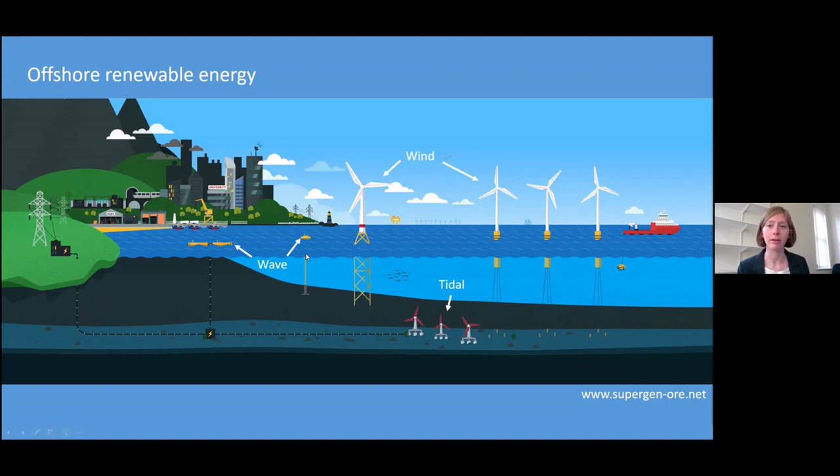I just put this up to show that I'm going to focus on the three main sources of offshore renewable energy power extraction technologies: wind power, tidal power, and wave power. That's what I'll be focusing on today.

So just so everyone knows what we're talking about, this is wind power, a wind farm. This is Hornsea 1, the largest offshore wind farm in the world, with a capacity of 1.2 gigawatts, enough to power over 1 million homes. Wind energy is by far the most mature technology out of the three.

Then we have tidal energy, which people tend to be less familiar with. The simplest way to explain it is you can think of tidal turbines as wind turbines, but they operate underwater. The actual technology of energy extraction tends to be exactly the same, and that's why they often look very similar in shape.

This is an example of a fairly large scale tidal turbine, 18 meters in diameter, rated at 1 megawatt, and a large scale industrial prototype. In this case, instead of wind generating the power, the flow movement through the tides moves through and powers the turbine. But other than that, it's very similar to a wind turbine.

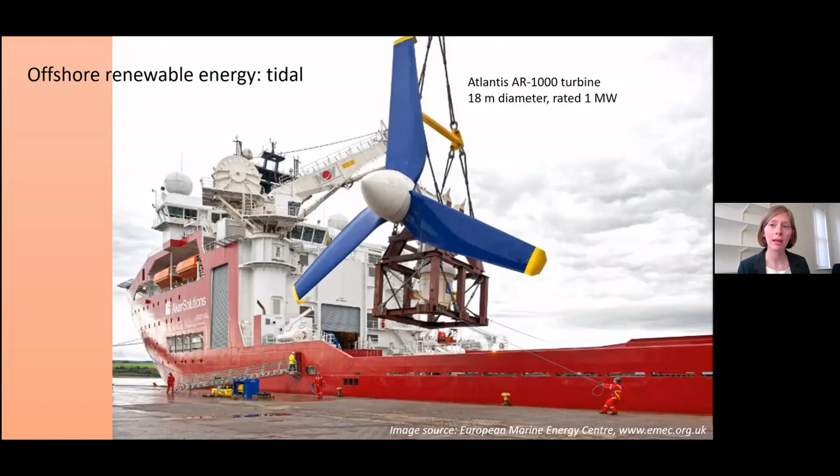And then we have wave energy. Here is a picture of a wave energy device. It's much more difficult to find a representative picture because there are so many different kinds, and I'll go into that a bit later. Here's an example of a 0.75 megawatt rated wave power device, a prototype being tested at a test site in Scotland.

So why talk about offshore renewable energy? Primarily the UK is investing in this because it has a huge offshore renewable energy resource. The UK is pretty much one of the windiest countries in Europe. I've read an estimate that around 40% of all the wind in Europe goes through the UK, which is quite a lot.

It also has an estimated 50% of the European tidal power resource. So the UK is investing in this because it's a natural resource the UK has a lot of. It's been estimated that offshore wind has the potential to deploy over 40 gigawatts by 2030, which is pretty soon—enough to power all the homes in the UK.

Tidal, conservative estimates say we could deploy up to 27 gigawatts by 2050. Wave, practical estimates say maybe 22 gigawatts by 2050 if we invested in the infrastructure. But to do this would require a lot of industry development.

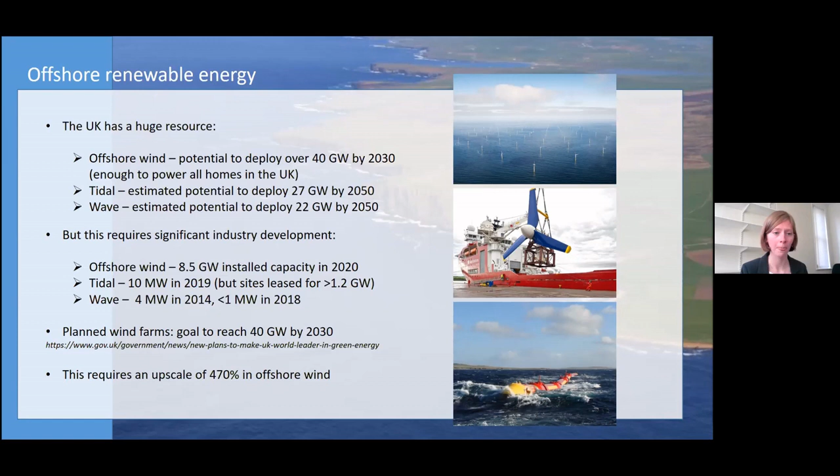So what I was going to talk about is, from a technology perspective, what does it take to scale up, in particular wind power, to those levels of production?

What engineering challenges are associated, and what are the consequences for energy security? And then I'm also going to talk about what might be the role of these smaller offshore renewables like tidal and wave, in order to contribute to this overall net zero goal.

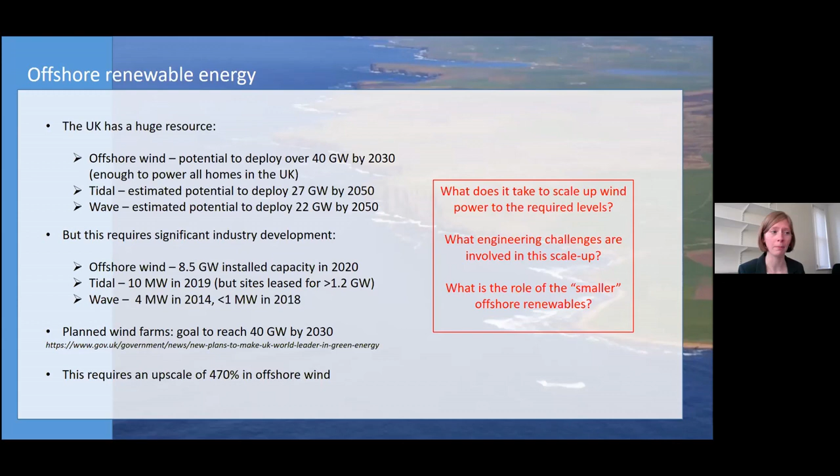I just want to go through quickly some things that I'm not going to talk about, sadly. There's so many aspects of this that I don't have time to talk about today, and that also is not necessarily my area of expertise.

Energy storage and grid connectivity is often brought up as an issue with intermittent renewable energy, and those are real issues being actively researched, but I'm not going to mention them too much today. There's also the environmental impact of offshore structures, which is a real problem being researched, but not my focus today. There's other things too, like logistics, infrastructure, government policy, but that's not going to be my focus today.

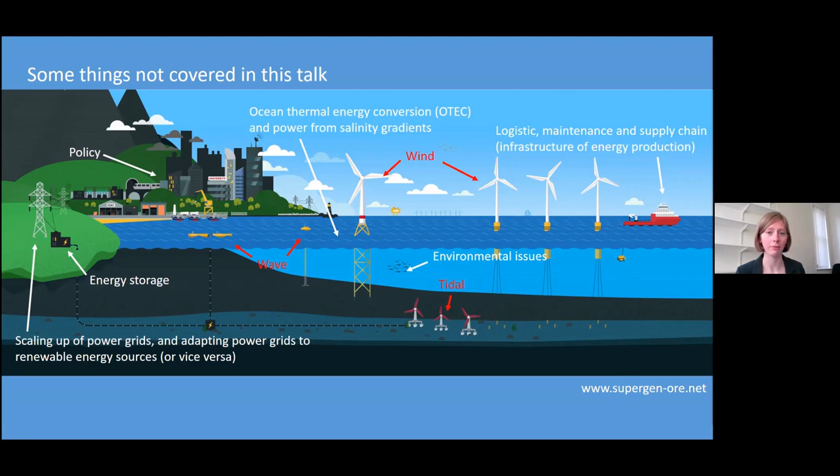My focus today is going to be primarily on the technology of energy extraction itself. So it's going to start off by talking about wind energy.

At the moment, the plan is that wind energy will be one of the primary means of reaching energy net zero in the UK, according to the government's plan. Currently, there are just over 8,000 onshore wind turbines installed in the UK and just over 2,000 offshore turbines. So there's about 4 times as many onshore turbines.

But offshore wind turbines are currently producing half of the wind power in the UK. So basically, offshore is giving you a lot more power per turbine. That's a real positive.

The reason offshore wind turbines give more power, or why you want to go offshore with a wind turbine, is that the winds are much more consistent and much stronger. That's really important because the power you get from the wind scales with the wind velocity to the power of 3. So if you double the wind velocity, you get 8 times as much power. So increasing the velocity makes a big difference to power production.

The wind is also less intermittent offshore. You can build much larger turbines because it's not as intrusive to communities and things like that. So all of these are good reasons for why it's a worthwhile investment to go offshore.

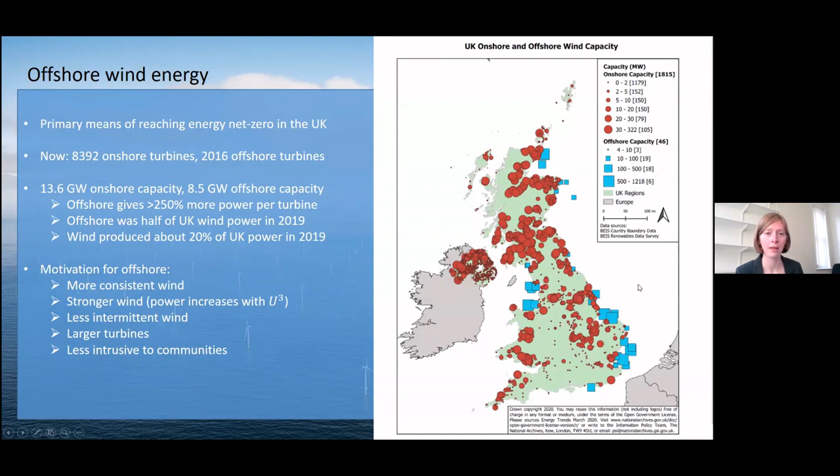There are 39 new offshore projects currently ongoing, which, should they all be realized, would represent roughly a 400% increase in the number of offshore turbines. If this all happened, that would actually reach the target of 40 gigawatts installed capacity by 2030. So far, we're on track to meet that target.

An interesting point to note is that a typical wind turbine lifetime is about 25 years. So while we often think about 2030 as the target, if we think about the 2050 timescale, we're actually going to have to build the same number of turbines all over again, because all the turbines currently in production will have reached end of life. So there's a lot of turbines that are going to have to be built.

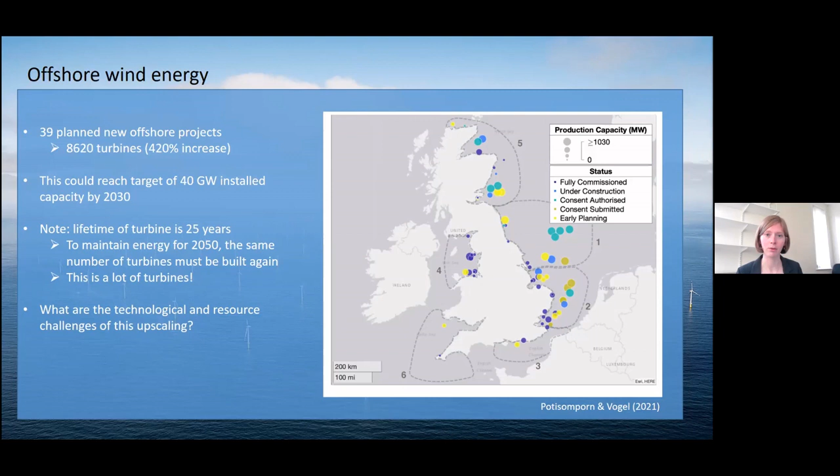So we're just going to talk a little bit about what the technological challenges are of such a significant upscale in wind turbine use and production. In terms of implementation of renewable energies and new types of energy, cost is basically the main driver for whether a source of renewable energy can be implemented at large scale.

The problem with going offshore is that building things offshore is really expensive. So even though you get more energy yield per turbine, building the turbines themselves becomes extremely expensive. Some issues include just building anything underwater—it's hugely complicated, and it's much harder to access the turbines for maintenance.

You need to think of issues like storms, and survivability of the turbines in very harsh weather conditions. Actually one of the primary costs is power cables. If you build very far offshore, which you might want to do because that's where the strongest winds are, you might end up with a really large expense in transporting that energy back to the mainland.

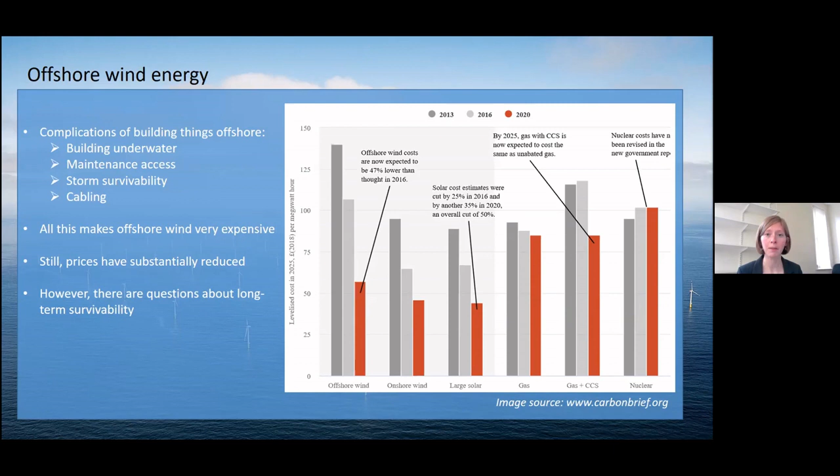But it's far from everywhere - there's quite a lot of very deep sea areas around the UK where you couldn't build a conventional turbine. In Southern Europe, you have potential too - if you look at Spain and Portugal, for example, they do have the resource, but the seas are just too deep for it to be practical to implement. Again, this is why the UK is in a good position to develop wind energy. But the fact that we can't build in deep seas is a problem if we want to scale up and rely on wind, because we're missing potential high-speed wind resource that's too far out into deep seas.

So one of the technologies that's been developed and is currently hailed as the key technology to enable more widespread international implementation of wind power is the floating platform wind turbine. In the UK, this is also hailed as the future of wind turbines. Even though we have quite shallow seas, it's still going to be a benefit in terms of accessibility of the resource.

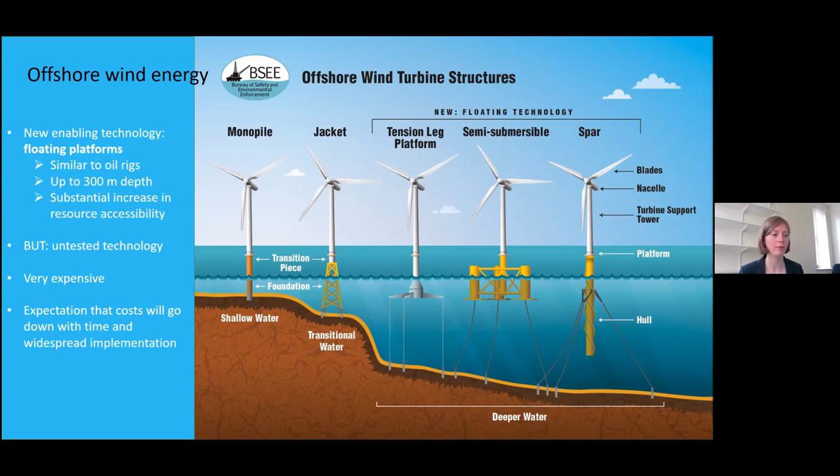But it is an untested technology - quite an early technology, and at the moment it's very expensive. The expectation is that the more this technology is implemented, the more the cost will go down. So rather than a technological problem, it's seen as an implementation problem - when this starts to get implemented, the cost should go down.

The problem with forces that oscillate in time is that even very small repeated forces can cause damage and eventually destruction of the blade—more so than a single large load that's constant in time. A small load that oscillates over a long period can be more damaging. So that's potentially a problem for this type of turbine long term. It's called fatigue loading, and that limits the lifetime of the turbines. A turbine with a shorter lifetime will produce less power over its lifetime, which increases costs.

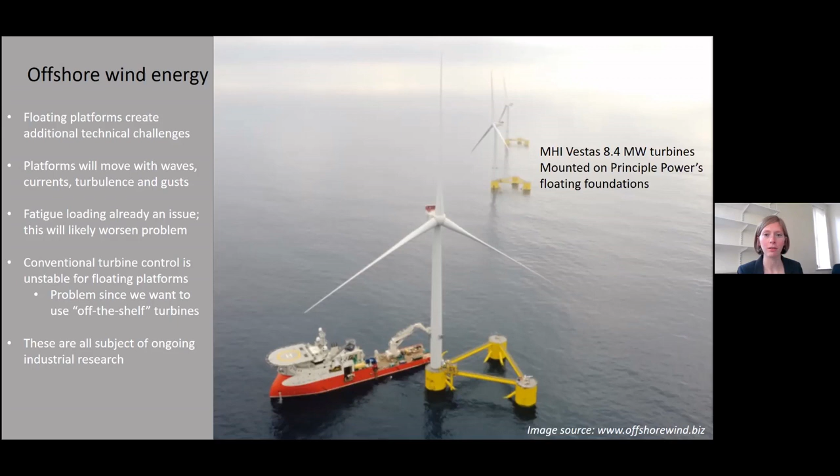But this is all subject to ongoing industrial research, and there are definitely indicators that these problems can be overcome. As I said, these technical challenges will not hinder the implementation of these wind farms—there is still going to be large-scale deployment.

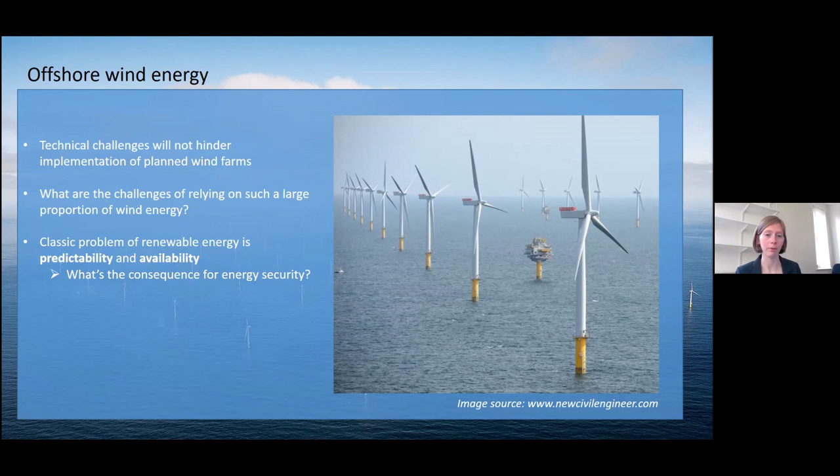So the question is then, what are the consequences of this large-scale dependency on wind energy? We're starting to go into more of a question of the predictability and availability of energy. What does it look like for a country to depend on an intermittent renewable like wind for a long period of time? What are the consequences for energy security?

Normally we start thinking about energy storage when we think about these things, and that is correct—we should think about developing storage technologies for energy to increase security. But another thing we can do is diversification of the energy resource. It turns out that if you increase the number of wind farms, you can actually increase the reliability of the energy system, but only if the different wind farms are not correlated to each other. If your two wind farms are not producing energy at the same time, if they're uncorrelated, then you increase the diversity of your system, which increases security.

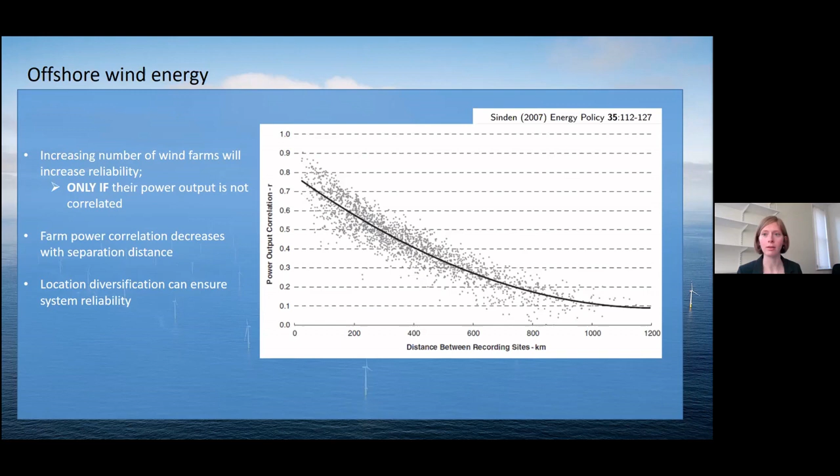And the interesting thing here is that this isn't just about how close the regions are to each other—it also depends on the prevalent weather systems that pass over the UK.

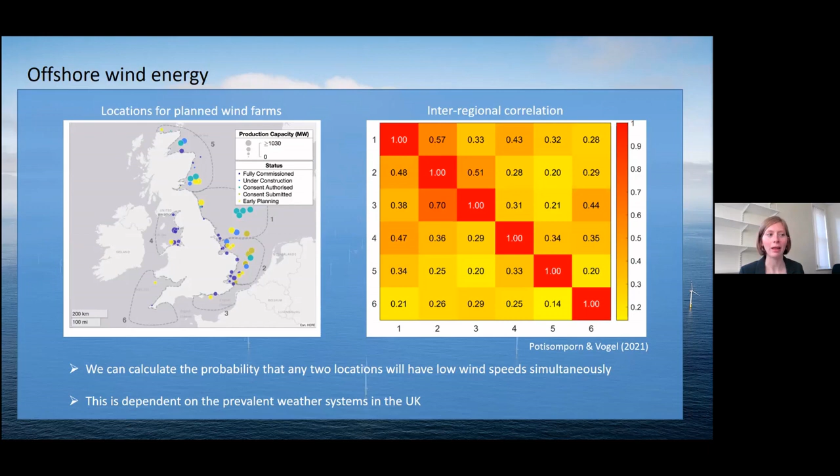There's a prevalent weather system that comes regularly to the UK, creating regions of low wind speed that tend to move through the channel from north to south. So we know because of these weather patterns that there will be long periods of time with low wind speeds in this sort of space. That's something we can predict, and we can have a probabilistic model of how likely it is that we'll have low wind speeds at any given time. So that's one way to increase reliability.

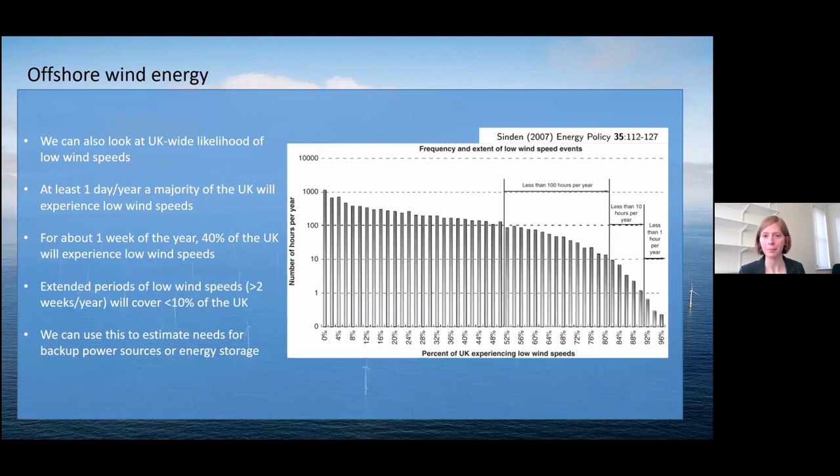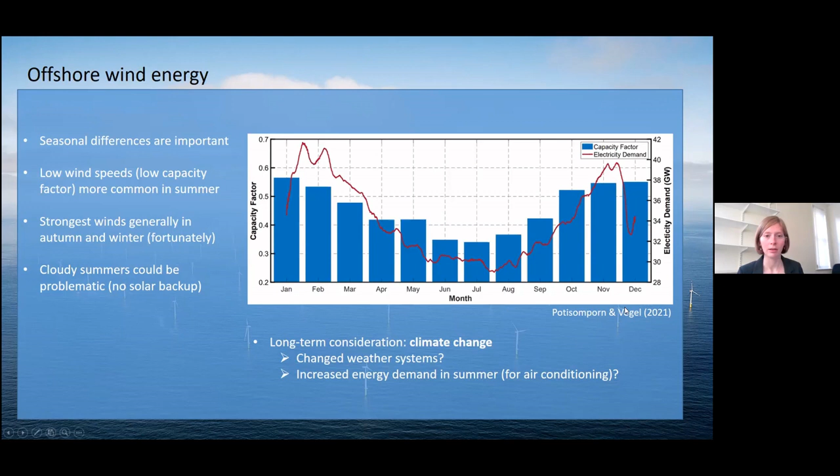Of course, a very interesting long-term consideration is climate change. I already mentioned that weather systems have a big impact on how much power can be generated in the UK and which regions can generate it. Climate change may change those weather systems, making it more difficult to predict long-term what's going to happen. We might also get increased energy demand during the summer because people start using air conditioning more. So all this adds a bit of uncertainty to the wind energy resource, which will need to be dealt with somehow. But for now, the correlations are pretty good in terms of available energy with demand.

So that was a summary of some of the ongoing research topics in wind power. There are a lot of other additional technical challenges, a lot of really interesting ones. Fatigue life, as I already mentioned—how to predict it, how to account for it, how to increase reliability. Another very interesting aspect of wind power is blade degradation over time because of very small particle impacts on the turbine blades, which erodes the blades and reduces efficiency of the turbine—that's really bad. You also get ice build-up on turbine blades sometimes, and you have to actually get helicopters up to wash off the blades, which takes quite a lot of maintenance.

Control of loads and power output is a big topic. We often want to increase the size of the turbines a lot, because that gives us more power, but is that even possible? Structurally, with the materials, that's a really interesting research topic.

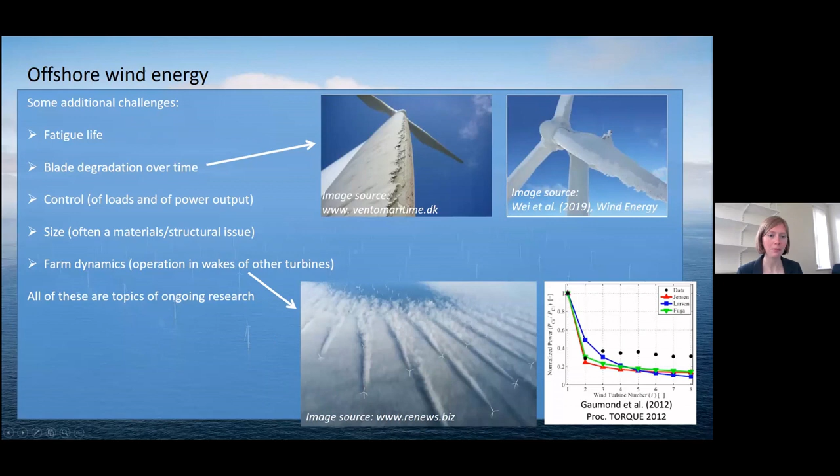But I do want to emphasize that none of these are technical limitations for widespread implementation of wind power. That's kind of the point. So what becomes a long-term issue is more, okay, how do we ensure reliability of the resource? A system that is very reliant on intermittent renewables needs a lot of redundancy or backup fuels to ensure energy security.

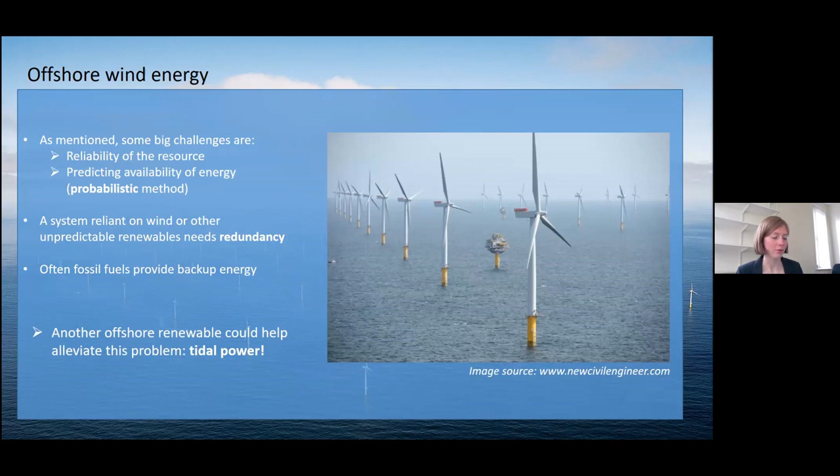In order to not rely on fossil fuels for backup energy, another offshore renewable could be a very suitable alternative as a renewable baseline energy, and that is tidal power, which is kind of my favorite topic because that's what I work with on a day-to-day basis.

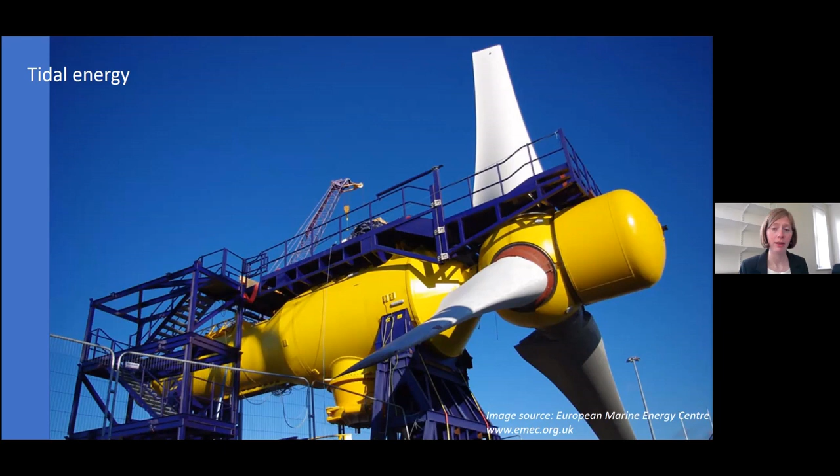As I mentioned before, tidal turbines and wind turbines generate energy using the exact same technology of energy extraction. The difference between them is that the working fluid is water rather than air, because both air and water are fluids, the only difference being the density. For that reason, tidal turbines often look very similar to wind turbines, but we'll talk about some of the differences between the two in a moment.

So why is tidal energy so interesting? Well, as opposed to the majority of other renewable energies, tides are completely predictable. So if you combine this predictability with storage, you can have a completely renewable and predictable baseload energy that you can use to complement intermittent renewables like wind.

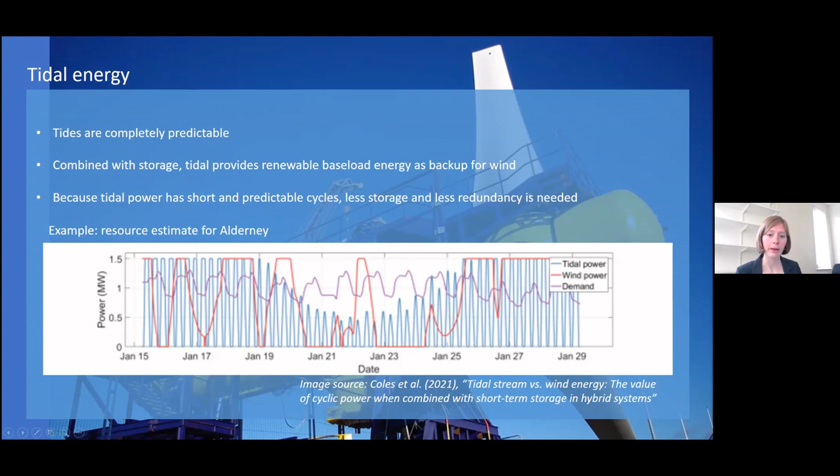As I mentioned, the UK has one of the largest tidal resources in the world. Predicted practically achievable energy is 27 gigawatts by 2050. But there's only 10 megawatts installed at the moment. So the question is, why is this industry struggling so much to take off? That's what I'll talk a little bit about now.

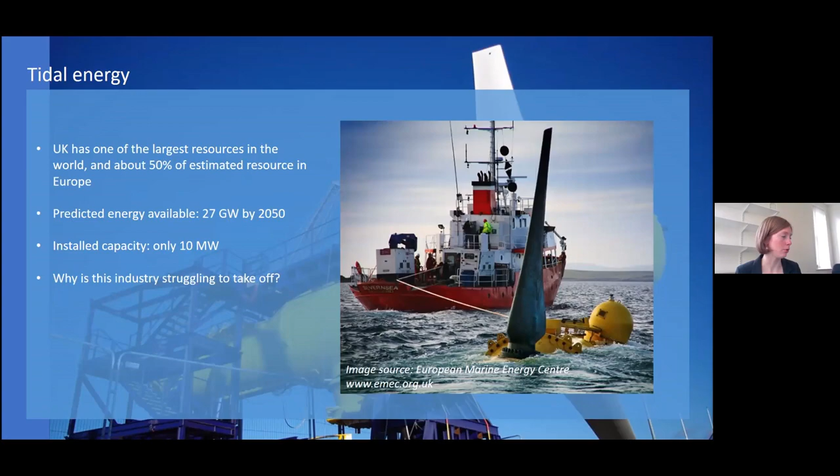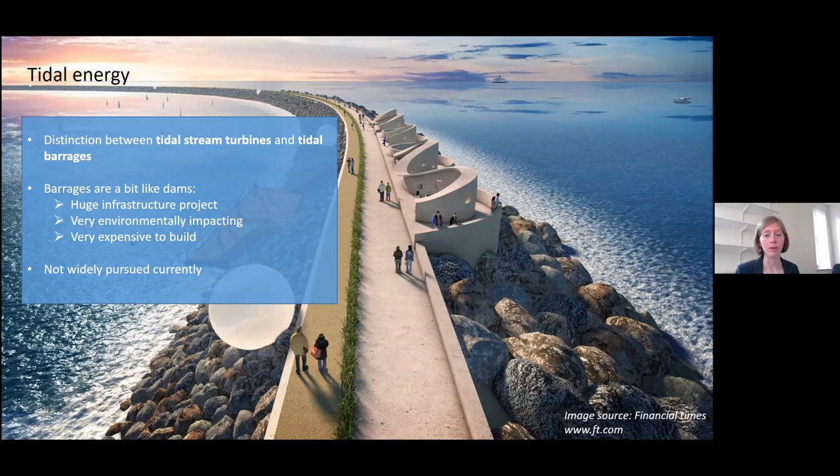There have been a few of those planned, and there are a few that exist around the world, but it is a huge infrastructure project. It costs a lot of money, and it's very environmentally impactful on the local environment. So it's a bit controversial, and there aren't really any projects planned in the UK at the moment. So that's not what I'm talking about. I'm talking about tidal stream turbines, which are freestanding, independent devices, and look much more like a wind turbine.

So there's a sure sign that the tidal industry is less mature than the wind industry, and that is that there are so many different kinds of tidal devices.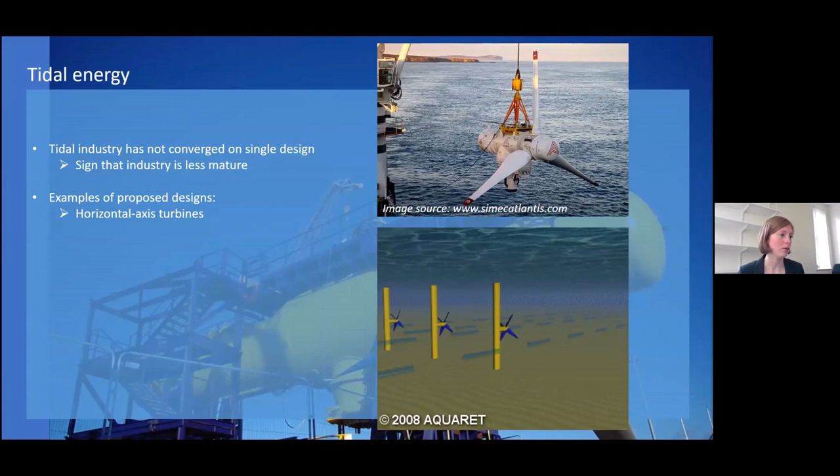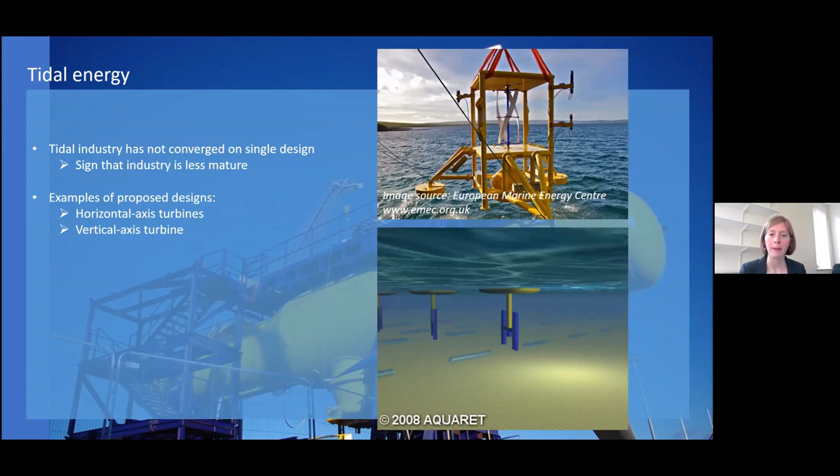So here are some examples. This is the most common kind - the horizontal axis tidal turbine. It looks a lot like a wind turbine. You also can get vertical axis tidal turbines, again very similar to equivalents in the wind industry. So those are probably the most common ones.

Then you get some very out-there interesting concepts like this, which is an Archimedes screw design. It's interesting because it's based around a pump design that used to be used in ancient Egypt to get water out of the Nile, and they've now rethought that design into a tidal turbine design, which is really interesting. But again, it's quite an out-there technology, not exactly the common solution.

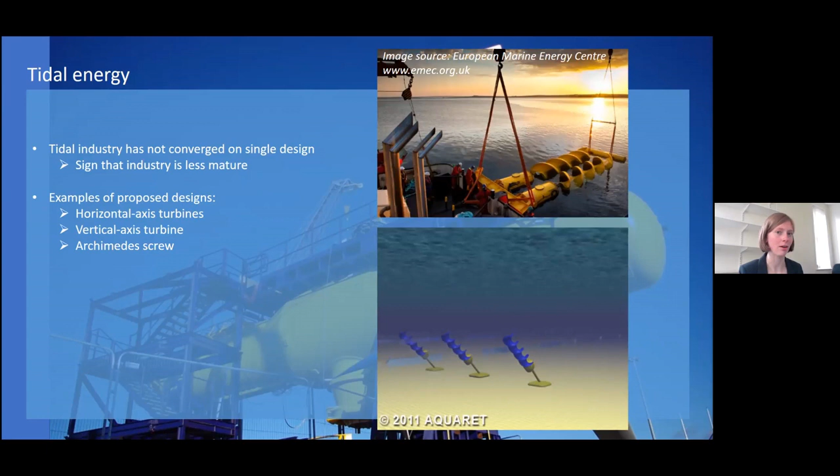And then another sort of a bit more unusual one is the tidal kite, where you tether this thing that basically looks like a propeller plane, and you increase the energy yield by forcing the kite to move in the shape of an 8. That increases the relative velocity of the turbine attached to the kite, and by increasing that velocity, you get more power. So it's a concept that's being developed, but it's definitely the more unusual one.

So as I said, there's definitely a sign that this is a less mature industry, because while it's really great to have all this innovation, it does make it impossible to have economies of scale. It's driving the fact that there's no convergence in terms of design, which means supply chain costs are going up a lot for tidal. So that's kind of one of the reasons why tidal is more expensive than wind.

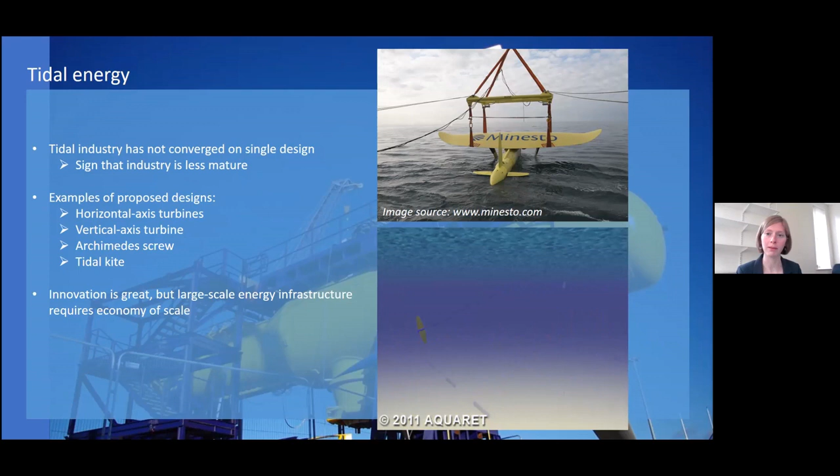As I said, the horizontal axis and vertical axis turbines are the most common ones, and they have very close equivalents in the wind industry. The vertical axis ones look basically exactly the same, and the mechanism of energy extraction is exactly the same. That's actually really beneficial for tidal power, because they effectively benefit from the wind industry being so mature - they learn a lot of technical know-how and gain a lot of experience from wind turbine design that can be directly applicable to tidal turbines.

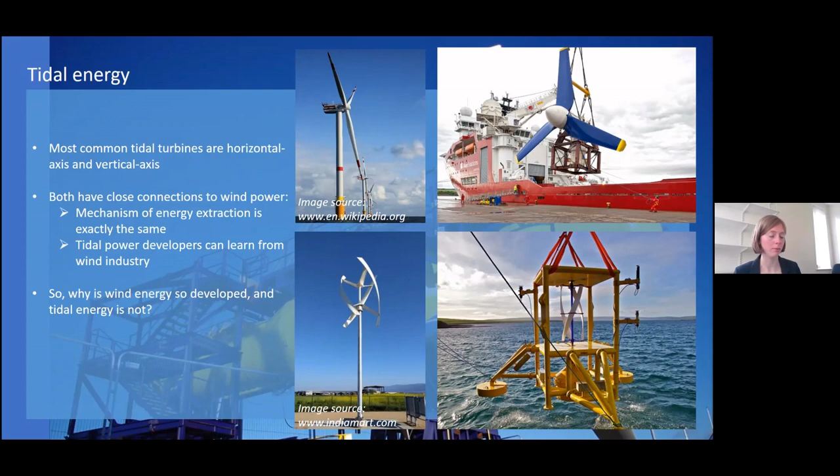But the question remains then, why is wind so developed, and why is the tidal turbine industry not so developed? So there are challenges that are definitely unique to tidal power, and that is slightly preventing them from really taking off in a big way at the moment.

Obviously the difference between wind and tidal is that the working fluid is water instead of air. And of course, water is much denser than air, which means it has much higher energy density. So if you imagine carrying around a bucket of 10 liters of water, that's going to take a lot more effort than carrying around a bucket of 10 liters of air. That's kind of what I mean by energy density.

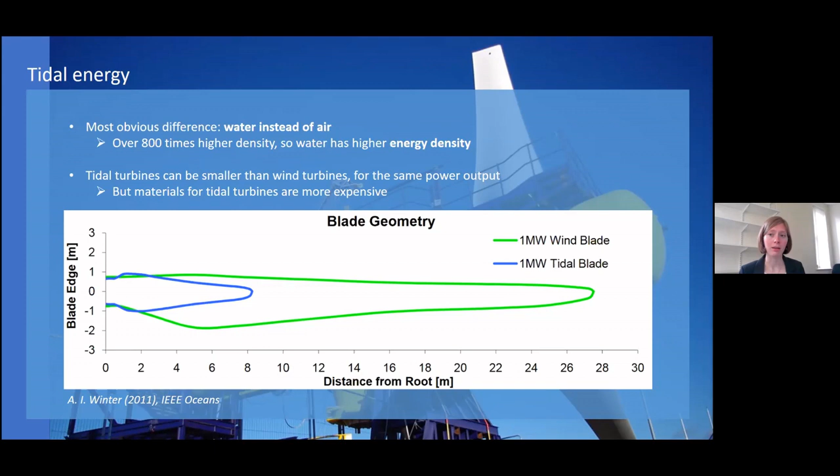This means that tidal turbines can actually be smaller than wind turbines and still produce the same amount of power. This picture shows a typical 1 megawatt wind blade in green compared to a typical 1 megawatt tidal turbine blade in blue - you can see it's a lot smaller. You could think, oh that's good, because then you can build smaller devices and that should cost less. That's actually not true, because tidal turbines need much more expensive materials than wind turbines, and I'll talk about why that is just now.

Because the other thing about tidal turbines is that they experience much, much larger forces than wind turbines. And you can see that by taking a very simple relationship, which is that power is equal to flow velocity times the thrust force acting on the turbine. That's just a simple shorthand way of estimating how much power is coming from the turbine and how much force is acting on the turbine.

Velocity matters if you think about a device producing the same amount of power. Typical air velocity would be around 12 meters a second, whereas typical tidal velocity would be 2.5 meters a second.

This is actually about equivalent to the amount of thrust from a modern day jet engine. So imagine tying a jet engine to the ground and preventing it from taking off. That's how much force is acting on a tidal turbine at any given time.

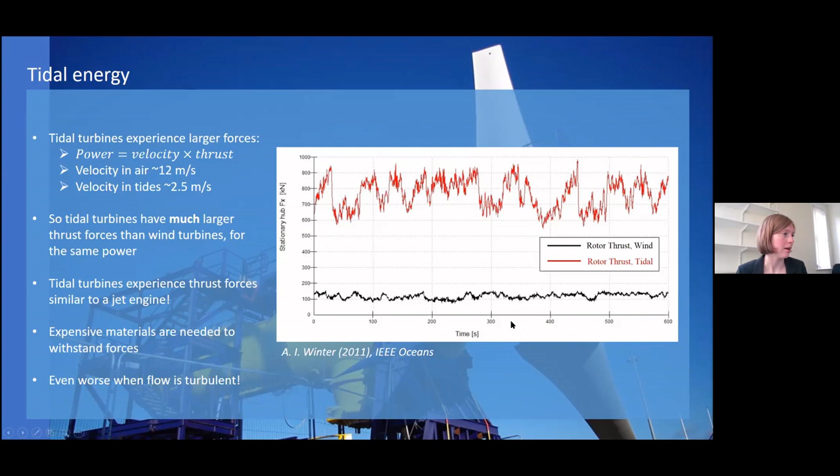So you need really expensive materials to make turbines that can withstand that kind of force. You need to use composites—for wind turbines you can use glass fiber, but for tidal turbines you need carbon fiber. That's a pretty big problem, and it's even worse when the flow is turbulent.

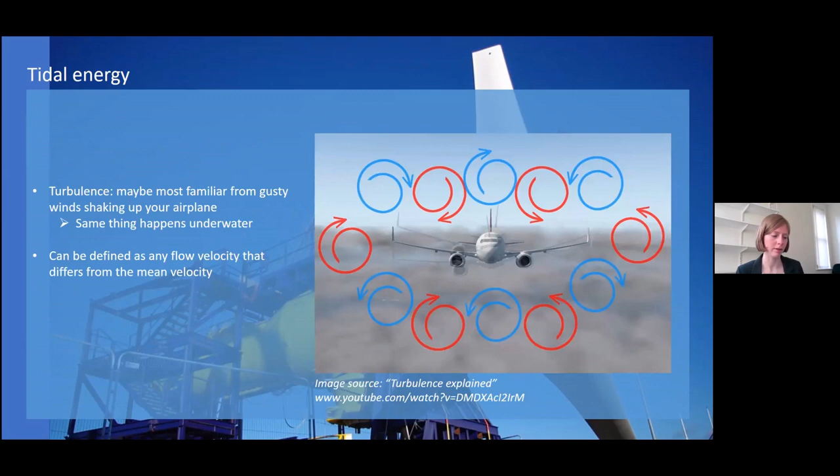Turbulent flow is probably something you've experienced on airplanes—you enter a region of gusty flow and your airplane starts shaking. Exactly the same thing happens underwater. You can basically think of it as any local flow velocity that differs from the local mean velocity. That's a really big problem for tidal turbines, because turbulence causes extreme variability in the local short-term inflow conditions.

While this doesn't matter too much for the actual power extracted, it matters a lot for the loads on the turbine, partially just because the thrust is larger. If you have 10% variability in 800 kilonewtons of thrust, that's a lot larger oscillating force than if you only had 100 kilonewtons.

I also have a theory that this is more of an issue for tidal turbines than wind turbines because tidal turbines are smaller. If you imagine a large, slender wind turbine blade, turbulent gust events are more likely to be localized and only act over part of the blade, since the blade itself is so big—some of this turbulence will just cancel out. Whereas for a tidal turbine, because it's so small, and because turbulence events in the ocean are so large, you get unsteady events that just envelop the blade. That's my belief as to why it's more difficult for tidal turbines to operate in turbulence.

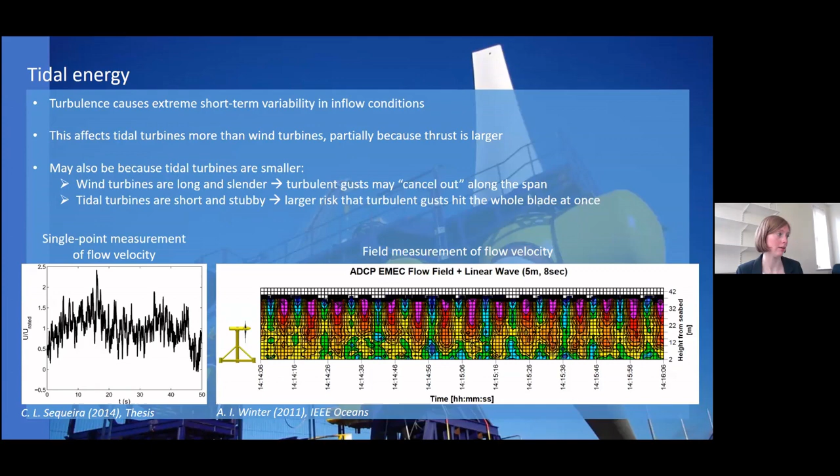So that causes a lot of problems for tidal turbines. Turbulence causes big problems not just because it causes very large loads, but also because those loads are very difficult to model. Turbulence is famously difficult and complex to model because it exists over a very wide range of scales—events can be hundreds of meters in size or just centimeters, and anywhere in between. Just modeling that whole complexity is extremely expensive and difficult to simulate.

We also don't have very good models for the correlation between turbulence and the loads acting on the turbine. It's not as simple as your flow increasing by 10% so the loads increase by 10%—it's not that simple. So we don't have good predictive models of what turbulence actually does to a turbine. This is, by the way, my research area.

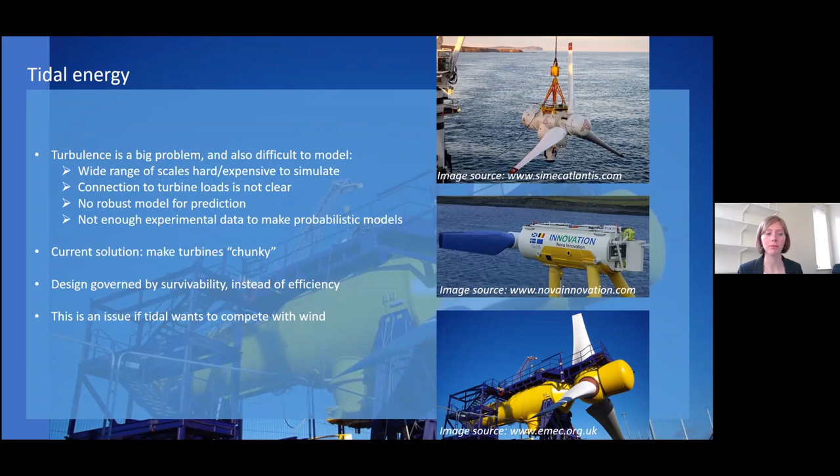And part of that is just the safety factor that's needed in order to get these turbines to survive. That's a bit of an issue if you want a competitive source of power that can compete with wind, because if you're designing for survivability instead of efficiency in power production, the cost of energy is going to go up. So that is an issue.

Because of all these reliability, survivability, and biofouling issues, tidal turbines need a lot of maintenance. How do you maintain a tidal turbine? They're underwater. How do you even see if one needs maintenance? They're underwater. With wind turbines, you can at least go and inspect them. But for a tidal turbine, you actually have to take it out of the water to clean it, check it, and maintain it regularly. That's a huge operational expense, and it contributes a lot to tidal power's cost of energy.

So that's one of the major obstacles, I think, for the cost competitiveness of tidal.

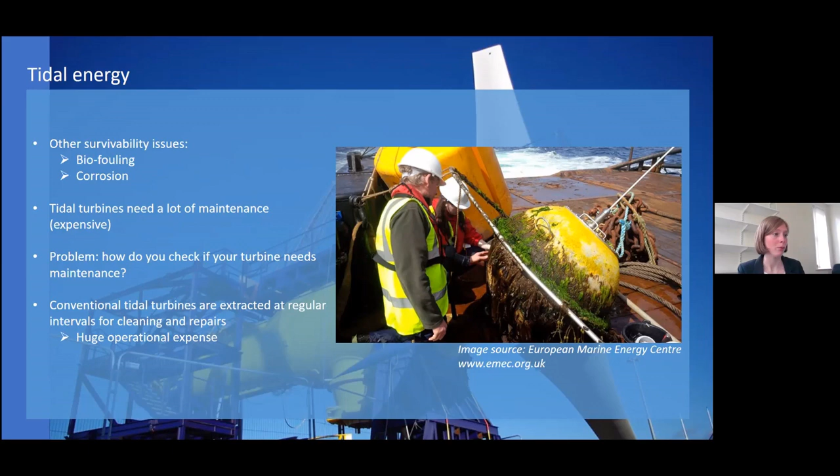One really interesting solution proposed for this is to have, once again, floating platforms. Just like for wind turbines, floating platforms were hailed as this key technology. Floating tidal turbines have been proposed and indeed implemented as a solution to solve this accessibility issue and the constant need for maintenance.

This floating platform has a lot of advantages. Accessibility is the main one, but you also get an advantage because the fastest flows in a tide happen near the surface rather than at the bottom of the ocean. As I said, power increases with velocity to the power of three, so reaching faster flows is a big benefit in terms of power too. Also, because they're floating, you don't have to build big intrusive structures on the ocean floor, which is expensive and environmentally impactful. You can just tether these with chains to the ground, and you can go to much deeper depths. So it has a lot of practical benefits.

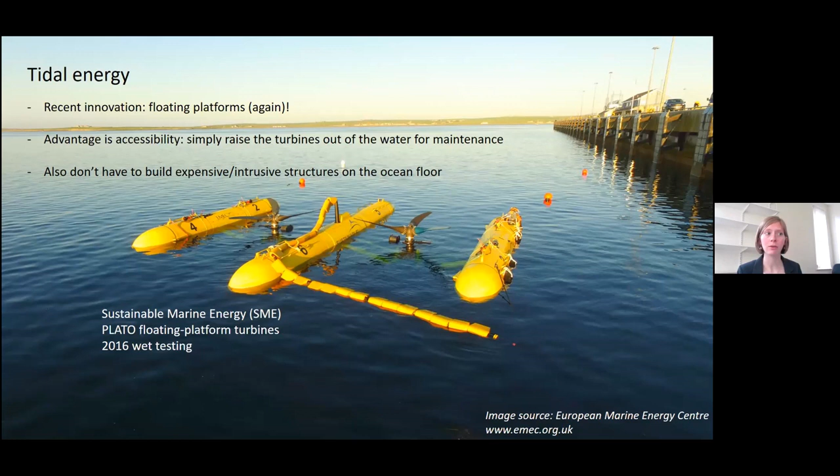But of course, floating platforms do come with significant challenges. Once again, platform movement is a big deal. If the platform moves, the turbines will move, and that gives rise to oscillating loads. Simulations indicate those loads are actually really large for a tidal turbine moving back and up and down like that, so from a survivability perspective, that could be a really big issue.

The other thing is surface waves. When you're closer to the surface, surface waves cause the same unsteady loading, which can reduce the lifetime of the turbine.

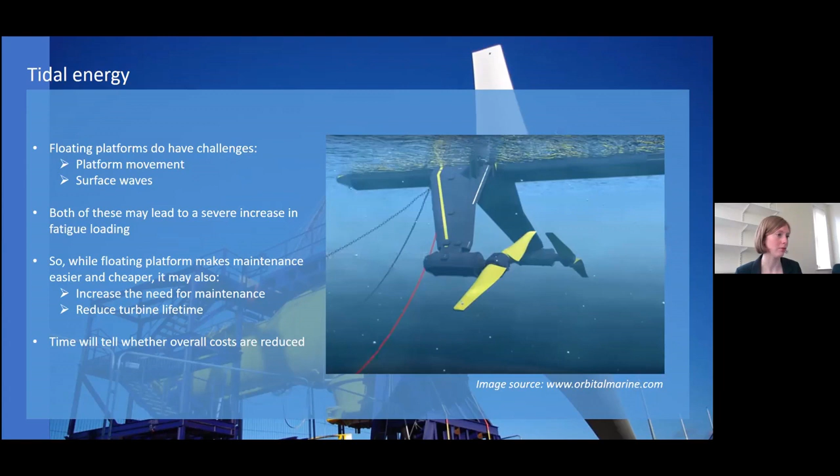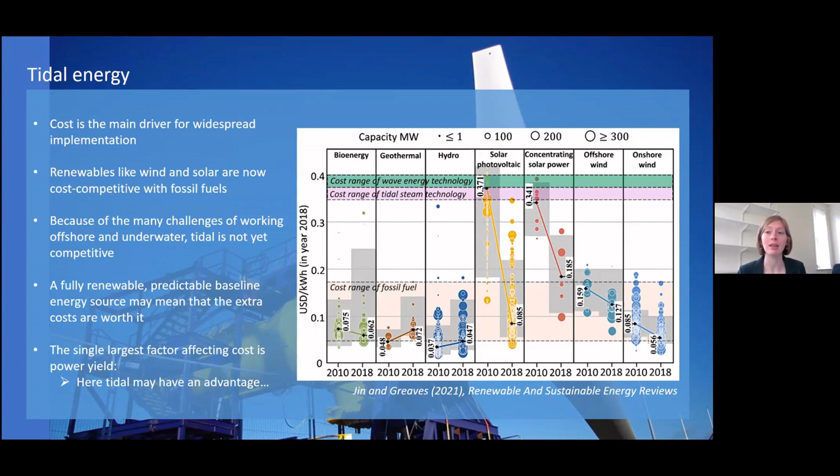However, for tidal power, the single largest factor affecting affordability, or the cost of energy, is actually energy yield — how much power you're getting out of a device. And here, in the long term, tidal might actually have a really big advantage over other renewables, even over wind. That's because of something called the blockage effect, which is quite unique to tidal power.

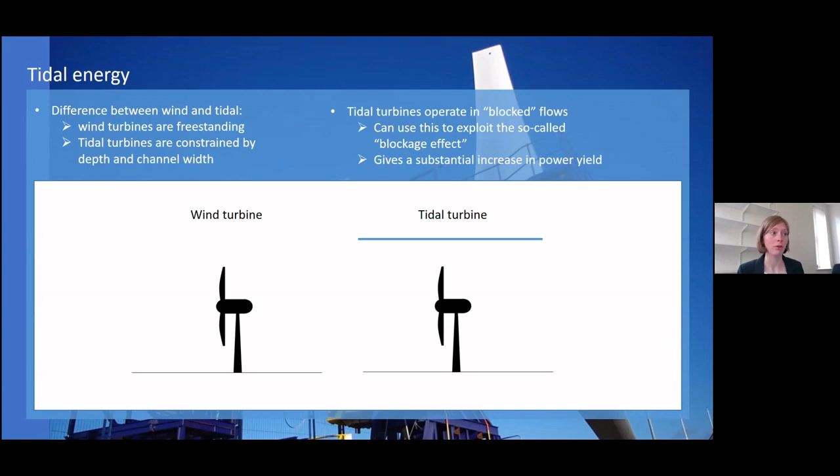If you consider the difference between a wind turbine and a tidal turbine, a wind turbine operates in the open air, whereas a tidal turbine operates in a constrained flow, constrained by the surface of the sea and even the width of the channel it's in. This means the tidal turbine operates in something called a blocked flow, and this can actually be exploited — something called the blockage effect — to increase the power yield of the turbine substantially. I'll explain quickly why that is.

This is a simplified explanation of how wind and tidal turbines extract power from the flow. Here's a simple sketch of a wind turbine: it extracts power from the particles in the fluid, so fluid particles move through the turbine and the turbine extracts energy from them. But by extracting energy from those particles, it's effectively applying a type of resistance to the flow — the more power it takes out, the more it starts to act like a wall to the flow, meaning the flow doesn't actually want to go through the turbine. If there's too much resistance caused by the turbine, the fluid particles will just move around it, and then you won't get any energy from it.

Because of this effect, a wind turbine has an upper limit on the maximum amount of energy it can extract, and that's 59% efficiency — that's the theoretical maximum. A real turbine will extract less than that, sort of in the 40s range, but that's the maximum theoretical efficiency.

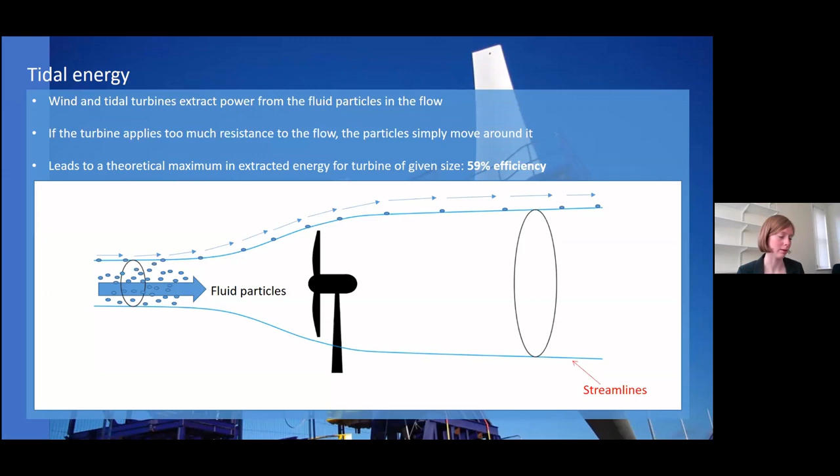Now if you think about the other extreme, consider a hydro turbine, which is completely enveloped by a wall in a pipe. At that point, the fluid particles have to go through the turbine — they're forced to move through its surface area. That means you can actually far exceed the 59% efficiency that wind turbines have, so you can get more energy from it.

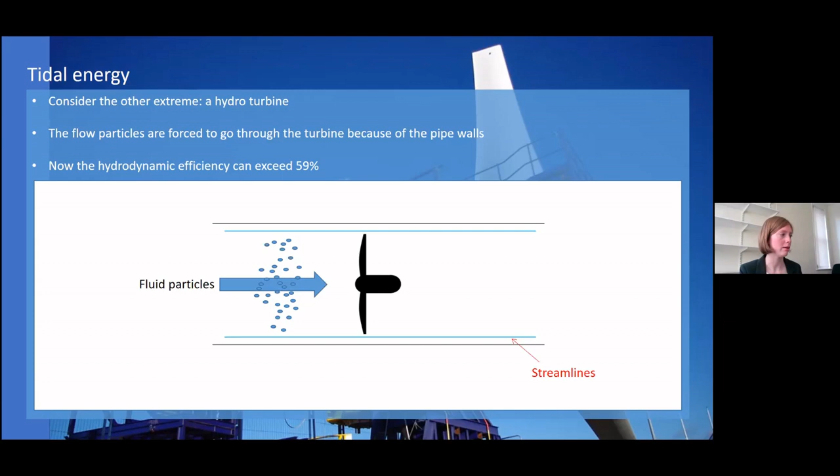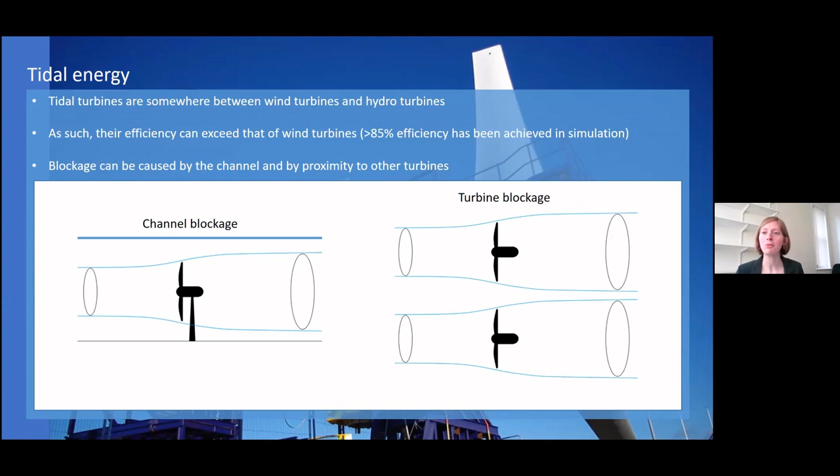Now, a tidal turbine is actually somewhere in between a wind turbine and a hydro turbine, because it's partially contained and partially constrained by the channel. Because the fluid particles going through a channel have this partial constraint, they're slightly forced to go through the tidal turbine, and you can increase the power yield quite substantially. You can do this either by putting it in a channel with a blockage, or by putting two tidal turbines very close to each other, which forces the fluid to go through the turbine and increases efficiency. In simulations, efficiencies over 85% have even been found, which is huge — almost twice as much as a conventional wind turbine. That would be a game changer if it can be implemented at large scale for a tidal farm.

So of course, this is kind of not realistic at the moment. This is a future vision for tidal. It's very theoretical. At the moment, the largest tidal site in the world has 3 turbines. That's not enough to exploit this effect. But for the same site, they've received permission to build another 50 turbines. So maybe this is forthcoming.

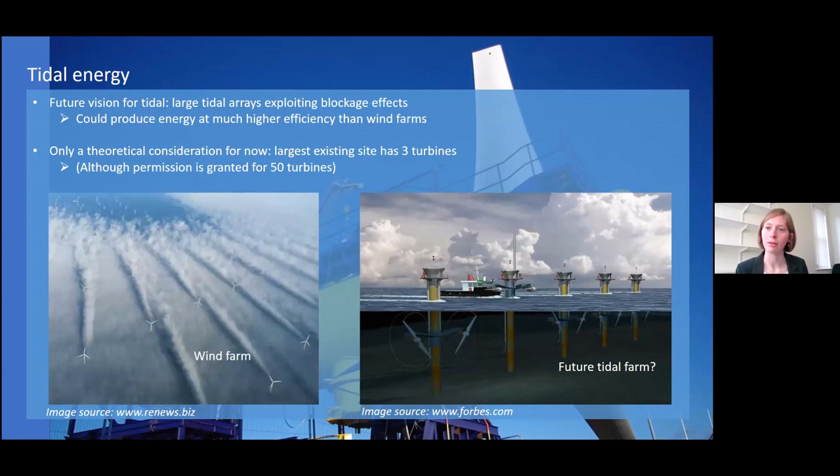So this would be sort of like a future vision for large-scale implementation of tidal, having these large farms that exploit the blockage effect such that their power production is much higher than that of an equivalent wind farm. That's partly why tidal technology could be very interesting going forward and could contribute a lot to the energy diversity in the UK.

To summarize: tidal power is not quite yet competitive, but that might not matter because of its predictability and because of this blockage effect that we can exploit.

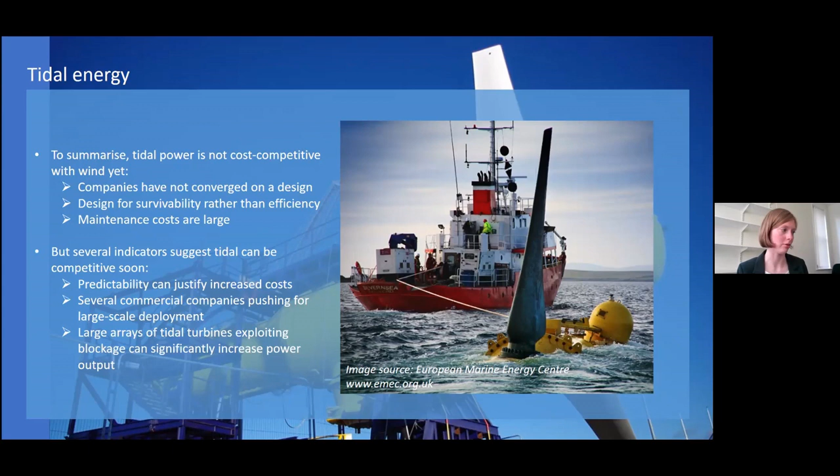So very quickly, I'm just going to go through wave energy quickly, partly because this is not really my expertise or the expertise of the other people in my group, but also because wave energy is probably the least developed and least ready for large scale production of the other renewables. So that's why I'm not spending as much time on this one.

Wave energy, interestingly, has attracted more investment historically than tidal power. I think wave energy seems to really resonate with people. It's very easy to look at the sea and see the waves and think, oh, that looks like a lot of energy, what if we could harness that? So it really resonates with people.

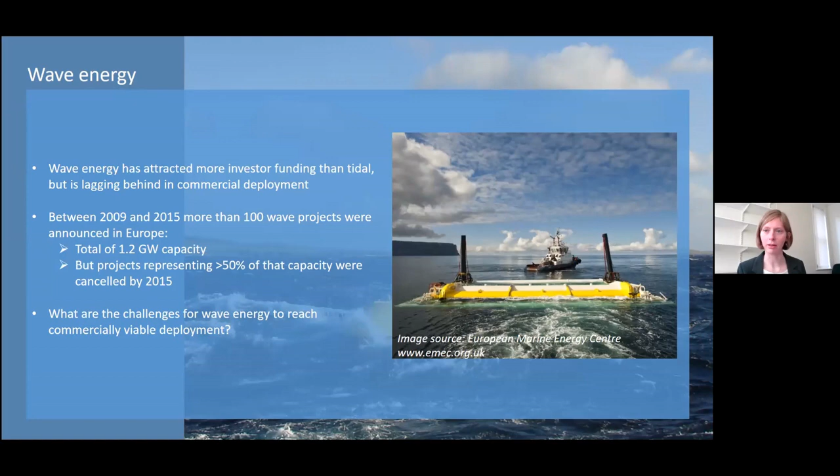But it's still lagging behind tidal power in terms of deployment. There's definitely some unique challenges to wave power that make it more difficult to develop on a large scale than tidal power, so we're going to look at why that might be.

One key complexity about wave power compared to wind and tidal is that waves don't actually transport fluid particles, they transport energy. You can see this really clearly in this interesting video, where the waves move through, but the actual particles in the flow are just doing a small rotational motion in a fairly stationary manner. So we extract energy through the fluid particles.

So wave devices have to find a way to exploit this localized movement, whereas wind and tidal power can just translate the fluid particles moving directly into rotational motion. So immediately we have another level of complexity with wave power.

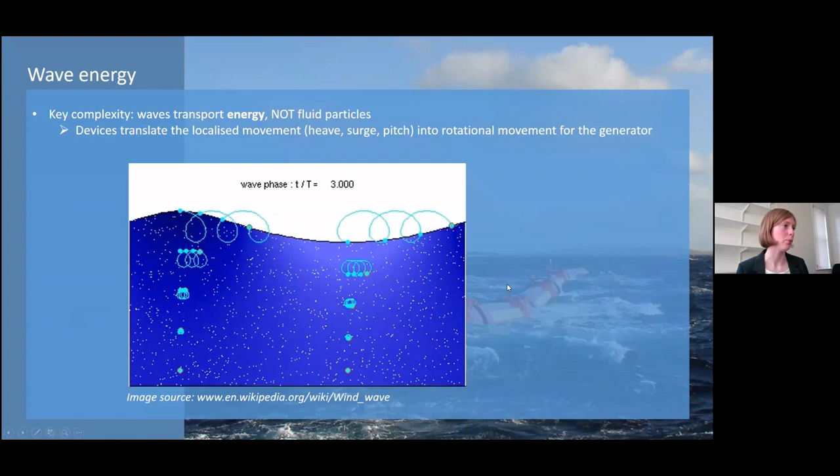And there are a large number of different designs proposed in order to translate this wave motion into some sort of rotational power to generate power from a turbine. Here are some of the more common ones. Absorbers will just bob up and down and use that up and down motion, translating it into rotational motion. Then we've got attenuators, which have hinged parts that move up and down with the waves. Those are your more localized, small scale devices that you deploy out in the ocean.

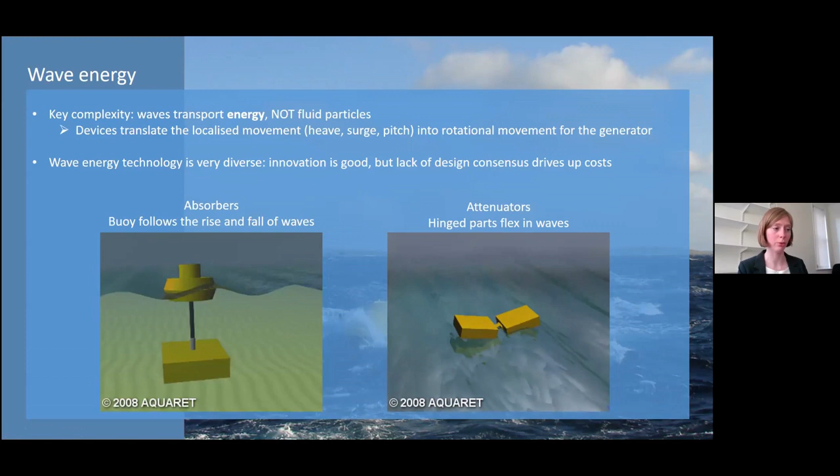Then you can have more large scale devices, almost more like infrastructure, that look a bit like dams. Here's an example of an oscillating water column, which utilizes the rising and falling water to drive, in this particular case, air moving up and down a tunnel with a turbine in it. You can use that with water as well - you can have the water move up and down through a turbine, so that would work too.

You also have these overtopping devices that capture the water in a sense and then let it run through a turbine. These are obviously larger, requiring quite large infrastructure investments to achieve. Once again, there's a lot of diversity, which is really interesting and full of fun ideas, but the lack of design consensus drives up the cost of the energy.

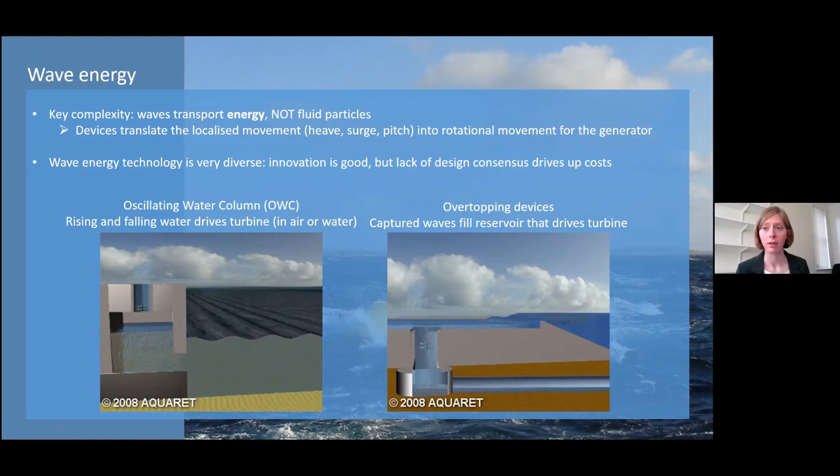Wave energy is caused by the wind, but it maintains power for longer than the wind. So from that perspective, it could be a good complement to wind energy, in the sense that they are not completely correlated - they're a bit correlated, but not entirely. Unfortunately, waves are strongest and have the most energy very far offshore, which is not cost effective because cabling it back in is really expensive.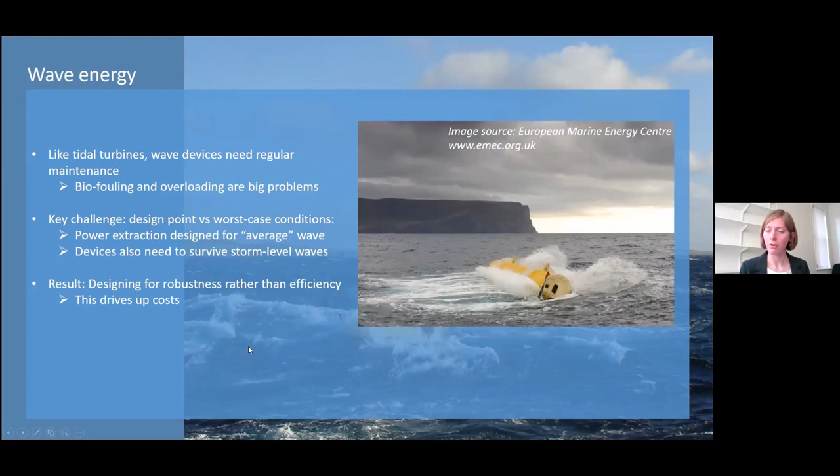So the problem really is still the cost of development and the reliability of the resource, much like for tidal turbines. Like tidal turbines, wave devices need regular maintenance. Biofouling is a problem, overloading is a problem. You also have to design for worst case scenarios where you're extracting power from your everyday wave, but you have to make sure the device can survive large scale wave events and storms. So this design for robustness rather than efficiency can drive up costs.

But one solution for the cost issue could actually be something like integrated platforms, which is an interesting development. This is a combined floating wind platform that also has ten wave energy devices on it, and this saves on costs because you can use a lot of common infrastructure.

But I think actually the key value here for wave energy is the fact that you get a sort of stepping stone technology. It's important to remember that wind energy had decades to develop onshore before it moved offshore, so they had all that time to learn and develop the product in a cheaper, more protective environment before moving offshore. Tidal power didn't have that, but they could learn from wind. Wave power didn't have anything like that—they had to go straight offshore, so they didn't have any stepping stone technology.

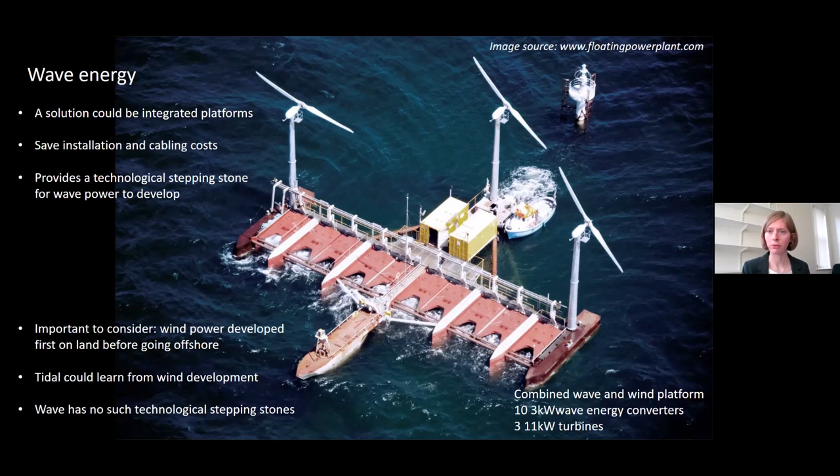So a thing like this, where you combine the platforms and make the cost of it a little less intrusive, combined with other offshore renewables, could be one of those stepping stone technologies to develop wave power further.

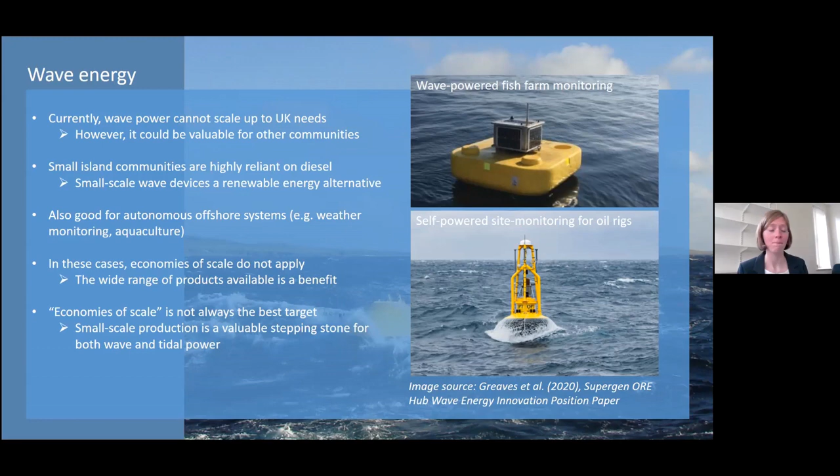So there are these small scale devices, and by targeting very specific applications instead of the wider UK economy need, you forego the economy of scale arguments, but instead say, okay, we're going to develop devices for specific applications in order to develop our technology. At that point, the diversity of the resource is a benefit rather than a hindrance.

Okay, so apologies for this having been a very long talk. This is my last slide, and I just want to say there are many engineering aspects of offshore marine technology that I haven't mentioned—deployment, infrastructure, maintenance, supply chain, cabling dynamics is a huge thing, and other things like that. This is an enormous industry and research area, but I do hope this talk has sparked your interest in some of it.

And I just want to finalize by saying, don't be discouraged about offshore renewable technologies. There are a lot of engineering and technical challenges, but none of these problems are unsolvable. This is, in a sense, what engineers do—they try to see these problems and solve them in order to make sure society can function. So don't be discouraged in that sense.

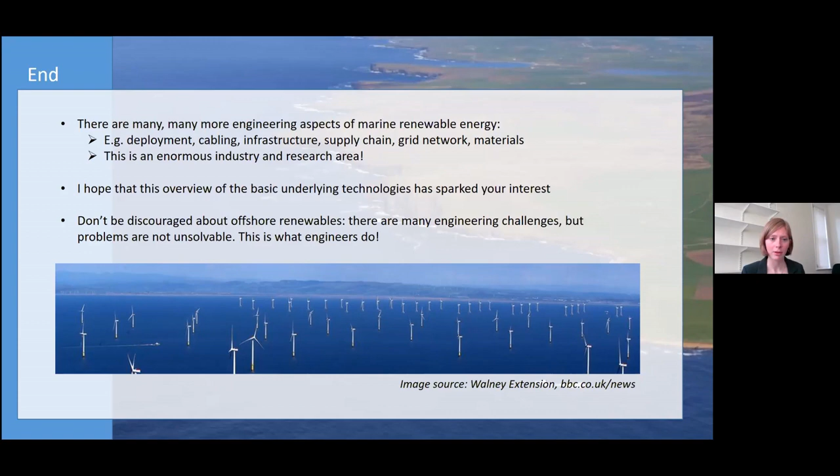Another question I had a lot of was about the impact of offshore renewables on marine life and things like that. I'm not super qualified to answer, but one interesting aspect is that for wind turbines, bird strikes are a big deal and something we talk a lot about. A really interesting solution that's been proposed is to paint one of the turbine blades a different color from the other two, because that creates a much more visually noticeable shape as it moves through the air. It's actually been shown that this does reduce the number of bird strikes.

But obviously that's a technology that specifically works offshore, because if you did that to onshore wind turbines it would have the same effect on people and be much more visually intrusive. If you had a wind turbine with one blade painted red, that would be much more visually intrusive to people. But offshore, you can use that to reduce the number of bird strikes. So that's one interesting technological aspect of that.

In terms of tidal turbines, there's a lot of research going on into how tidal turbines affect habitats, and whether there's impact damage for marine mammals and fish. Basically this has not been observed - it's not really considered to be a big problem for tidal power. It seems like marine animals tend to avoid tidal turbines. But again, it's such a small scale deployment at this point, so it's hard to tell what's going to happen as we increase deployment.